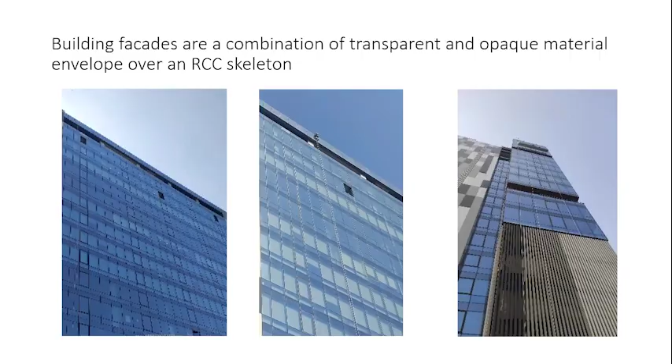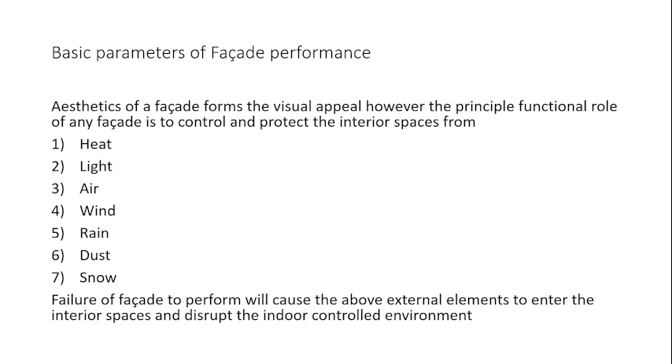Now, what are the basic parameters of facade performance? Because these facades are provided in a manner that they are supposed to give you certain performance. Apart from the aesthetic appeal, they are supposed to control the heat, the amount of light that comes in, the air, which is the outside air should not be coming in, or the inside air should not be leaking out, the wind. Now, air is whatever is the ambient, but the wind is when you have a storm or very high speed winds coming. So that's a different parameter altogether. Rain, dust, and snow. Now, the facades that do not perform against these elements fail, and this is what we are going to discuss. And then your interior space, which is a controlled environment, gets disrupted.

So what are the facade materials made of? I'm just talking about primary materials because otherwise we can go on a lot of elaborate discussion. So glass forms the transparent material, which nowadays comes with a particular coating, and these coatings are supposed to give a certain performance. They will allow a certain percentage of the ambient light to come in. So if it is a warm climate, it will control the light in such a way that less light and heat comes in. And if it is, let's say, a cold country, it will allow more light to come in. So depending on which environment you are situated in, you select the glass. We don't just select the glass for aesthetics. We select the glass for its performance. And that's why they are called performance glasses.

Cladding is the opaque material which integrates with the facade system where light is not desired to reach the internal environment. And these can be any kind of solid metal sheets, ceramic tiles, natural stones, GRC, anything that you can dream of; even bricks can be integrated into facade for that matter. So it is just a method of how you implement and integrate this in a manner where it not only gives you an aesthetic appearance, but also controls your internal environment. Now, this entire system is mounted on aluminum frames, which support the glass and the opaque materials, because you need to mount it onto the RCC structure.

And because these are made of panels, there are vertical and horizontal joints which run through the entire system. And these joints will have the silicone or the gaskets. Now the gaskets and silicones basically form the seal in these joints so that the outside environment does not get inside, and also it allows for the movement of the facade panels.

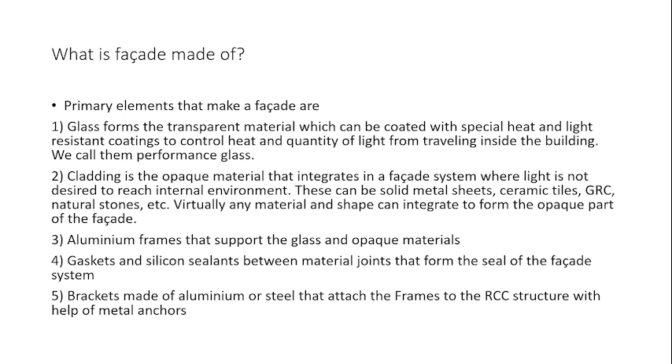And then this whole thing is mounted with the help of brackets and anchors onto the RCC structure, because that's what holds the facade. So these are basically the 5 materials that you can associate the facade with. Now, how does it fail? Because once the facade fails, that's when it stops performing. It allows the outside environment to come in. It leaks the inside air to the outside. So how does it fail actually?

So the glass in buildings nowadays is normally double glass units. Previously, when we started facade building, they were all single glass. But now virtually every building is double glass, and in some places where high performance is required, it is triple glazed also. And it fails if the seal between the glasses fails. These glasses have an air gap, and then there is a seal which goes all around the glass. So that's when it fails.

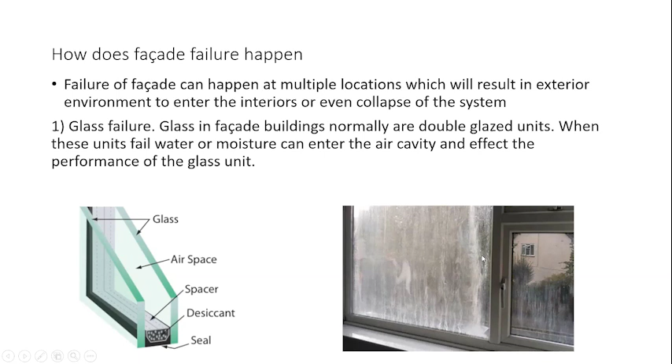It allows the water to come in, and then you'll find moisture coming in or the coating getting damaged. So that is one way of failure. When the coating gets damaged, it will cause some kind of a rainbow effect. You will not have the performance of the glass. It will not perform in terms of stopping the heat properly, and it will not allow the correct gradient of light inside.

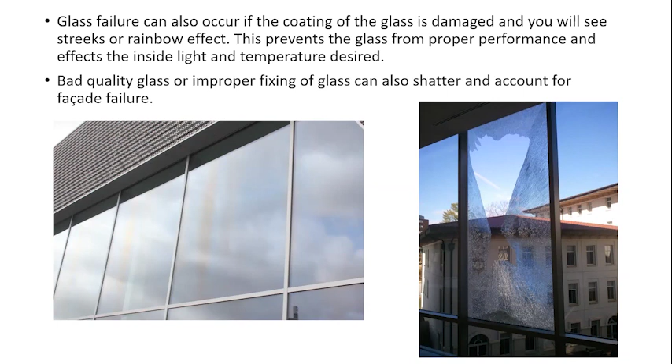The other failure that happens in glass is when it is either improperly fixed or the quality of the glass process is not good. So when it starts to shatter, you'll find that a lot of buildings complain of glasses shattering. The primary reason is either the quality is bad or the fixing is improper. When the fixing is improper, the glass comes under a lot of stress, and the moment these glasses are stressed, they will shatter.

The other material is cladding material, which I mentioned, that can basically be any kind of cladding material. Even that forms part of the building envelope, and the failure of that material will also cause the facade to not perform. These are generally where we have dead walls. This is where we have the cladding, or where the light is not required to come in. And this interfaces with the structure and the glass that forms part of the facade.

So basically, wherever you have the glass, you will find that the termination is in some kind of a cladding material, because aluminum sheets or any kind of sheet material are flexible enough to be bent, and then they form the joinery between your RCC and the glass material. Like this example of coping. Coping is at the top of the parapet wall. Once the glass finishes the termination, you need to have the whole thing as a coping so that the water does not enter between the glass facade and the walls.

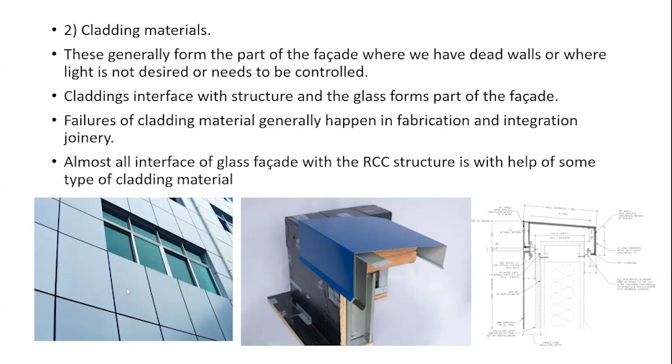So wherever you have these interfaces, the end terminations, you will have some kind of opaque material which will interface with your building so that the outside environment is sealed. Plus, you have the dead wall areas where you can do virtually any kind of opaque facade, whether it is aluminum sheets or ACP or tiles or stones, which I had mentioned earlier.

Now, this is what happens when your interfaces fail. Basically, the water starts to come in from the sides, and the whole interior environment gets disrupted. And these are very costly to rectify, because in a facade, you cannot just remove an element and refix it. So a lot of care has to be taken at the time of facade implementation.

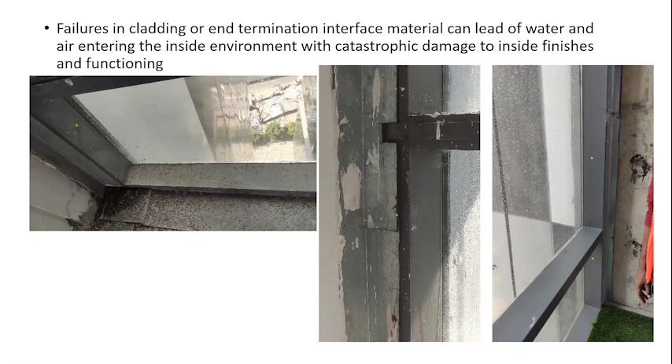The third element is the framework that holds these opaque materials and the glass together. You need aluminum frames because they are lightweight. Secondly, you can extrude it to any design that you want. MS has a limitation. You cannot extrude it very intricately, but aluminium you can intricately extrude. So whatever design you need from the frames can be made,

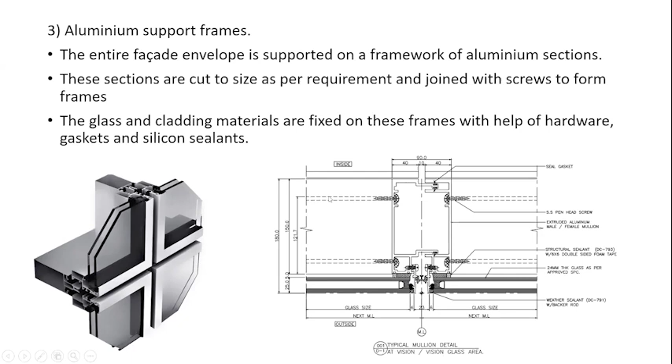and they can be extruded in an extrusion company. And then we attach the glass and the gaskets and the silicone, we make the entire frames, this is joined, and then the whole thing is called a facade unit. Now, the failures basically happen when these joints are not done properly or the design is not proper.

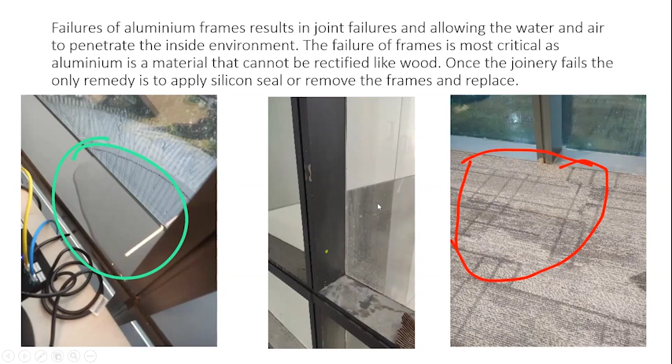So you'll find that either they are not sealed properly, or there is a movement in the facade which is unaccounted for in the design, or there is a movement at the time of installation which has caused the joints to open up. And this is what happens then. The joints open up, the gasket seals get separated, and then it allows the water and the air to come in. So you find a lot of water during the rainy season, especially in a city like Mumbai. You'll find a lot of rain water coming in.

The fourth is the gasket and silicon, and that's the most important, because that's what actually seals your facade. The glass and the opaque material are hard, brittle materials. But the gasket and silicon are the flexible materials. So they basically form the joints between these rigid materials. The gaskets allow the individual facade components to move as per building movement, the expansion and contraction of the facade unit as per outside temperature, at the same time maintaining a water and airtight assembly.

While gasket forms flexible seals of the facade, the silicon on the other hand forms the fixed sealing of the facade, where gasket provisions are not desired. Silicons are also strong enough to hold the facade material, and these silicons are called structural silicons. So they hold the glass onto the aluminum frames.

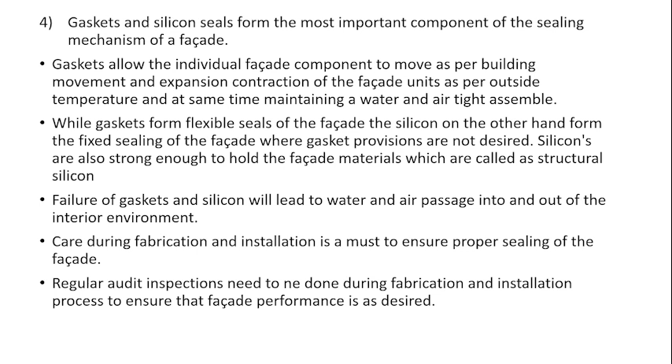Now, failure of gaskets and silicon will lead to water and air passage in and out of the interior environment. So you have to take a lot of care during the installation and fabrication to ensure that the gaskets are in the correct place and the silicon seals are done properly. And you need to do a regular audit at every stage of the implementation and fabrication, because that's the only way you will improve on your implementation.

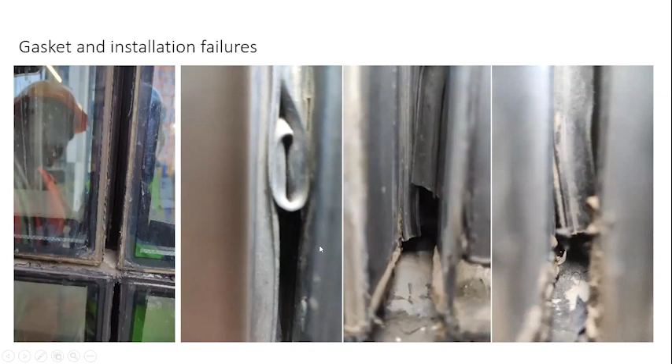So this is how some of the failures are, where you find the gaskets are twisted or they are short, the alignment of the panels has gone skewed. Now, once all this happens, your facade starts to fail. These are pictures taken from the outside of the facade.

Then the last one is the brackets and the fasteners, which actually hold the entire assembly. And you need to design that properly, because that is the strength material. If that fails, your facade can fall off. So there's a lot of attention paid to the bracket designs and the anchors, which go on to the RCC structure. Even the RCC structure health has to be good. Like if you have an M40 concrete or an M50 concrete, then your brackets are designed as per that.

So facades that move due to improper bracket and fastener will cause the joints to open up and allow the external environment to enter the interior controlled environment. So the movements are not desired, only the allowable movements due to expansion and contraction. Otherwise, the movements are not allowed in the facade. And of course, there are certain earthquake movements also for which the facades are designed. They are also allowed.

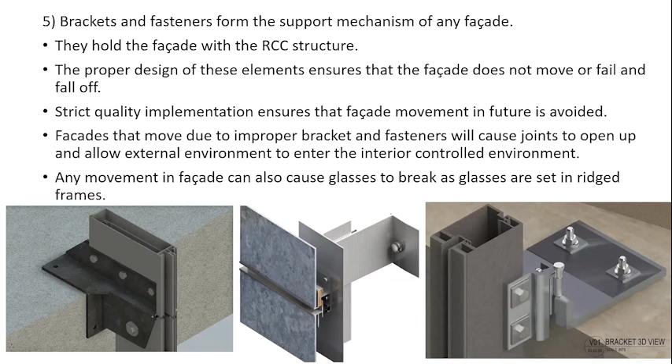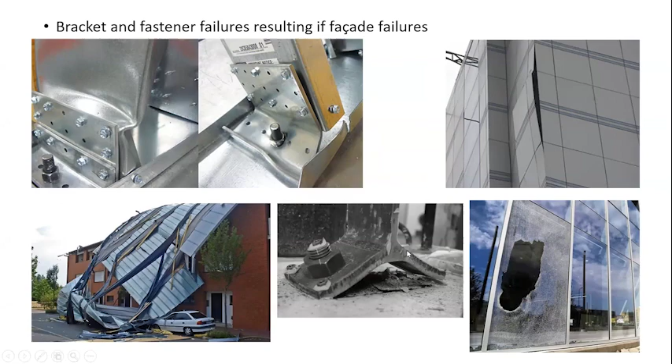So lastly, I'm stressing a little point on the facade audit, why it is important. Facade audit by a third party. Always you have to do a third party, because whoever is party to the contract cannot very honestly conduct a facade audit. So a third party is always the best. So you get the person on board right when the project is starting, so that regular audits can be done and you can keep improving the quality as you go along. So reports can be generated and according to that, you can improve the facade.

Now, facade forensic is when the facade has failed. So audit is when you are actually making the project, and facade forensic is when something has gone wrong and you try to find out what is the problem, why things have gone wrong and how to rectify. So forensic helps you in getting the correct solution to the problems that have occurred. So both are very important. Of course, audit comes first. If the audit is done properly, you will possibly not need the forensics. So this is in a nutshell a little about the failures of the facade, how it affects the environment.